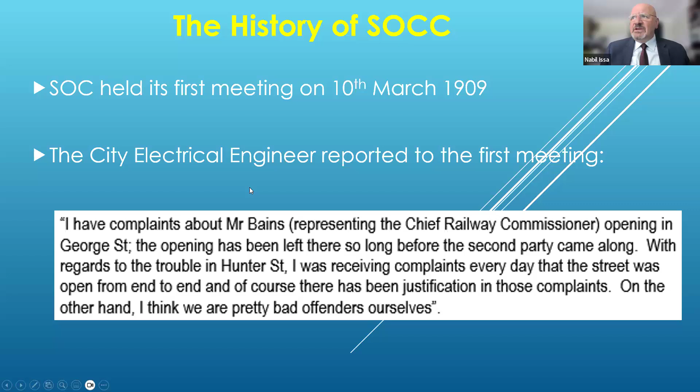In 1995, that organisation was reconstituted to cover the whole of the state. And in 2013, it was incorporated and renamed, rebadged as the Streets Opening Coordination Council.

So some of the outcomes of the work that's happened over 115 years, but in particular in the period after reconstituting the organisation to become a statewide organisation, it's become a peak industry forum for collaboration, sharing of information, and developing standards between road authorities on one hand and utility service providers or utility asset owners on the other hand.

One of the key outcomes was the formation of an organisation called the Sydney One Call Service, which later became Dial Before You Dig New South Wales ACT.

And there's been numerous other documentations and agreements put in place. Some of those were the shared trenching agreement, which involved 2-way or 3-way types of agreements. A 2-way would be between the power utility and the telecommunication carrier. The 3-way would be between those two organisations plus the gas company.

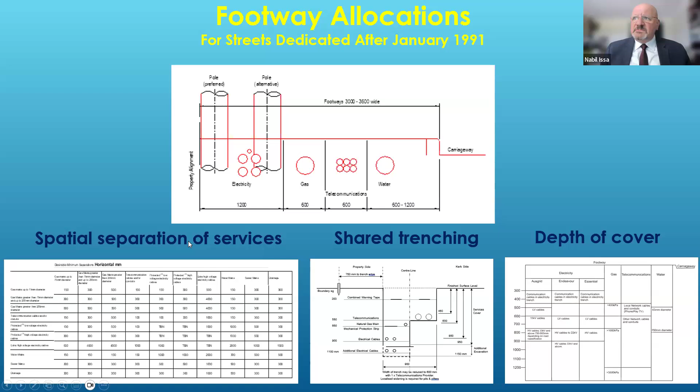So that was a bit about the history of the SOCC. What is the future of SOCC? SOCC has been working on rolling out the work that's been done over 115 years on a national basis. We acknowledge that the issues experienced in New South Wales are not unique to this state. They are common right across the country, hence the initiative to look at rolling the organisation out nationally.

Then there'll be the South Australia, Northern Territory and WA chapter later on. In terms of timing, by December this year there will be a New South Wales ACT chapter in place, and the first of the other chapters will be set up in March 2025. That'll be Queensland and Tasmania initially, and then we'll work on getting those other chapters in place later in 2025.

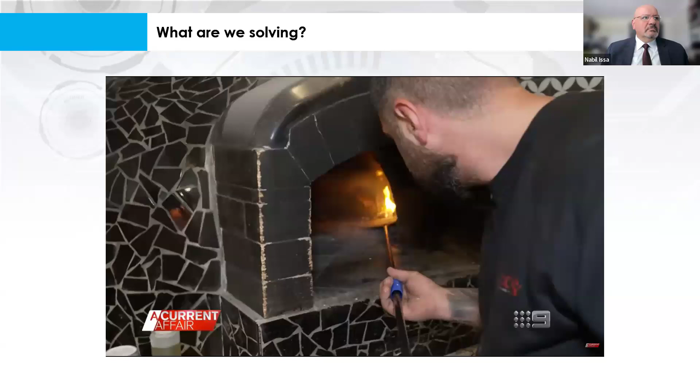Two councils and one road that runs between them, what could possibly go wrong? In this case, plenty. The road needs resurfacing, but the councils didn't work together, leaving the job half done. On one side it's pockmarked with potholes, on the other, beautiful blacktop. Poath Road in Melbourne, cutting through Murrumbeena and Hughesdale, is the borderline between the city of Glen Eira and the city of Monash. Monash went ahead with their resurfacing a few weeks ago, while Glen Eira chose not to crack on at the same time, frustrating locals like George, who runs Chichio's Pizza, and Wayne, a resident, who both say the councils should coordinate. The mismatch runs for more than two kilometres. Experts say working together could split costs and deliver better value for ratepayers than hiring separate contractors. Glen Eira Council says they plan to fix their side eventually, with CEO Rebecca McKenzie saying both councils worked together to ensure Monash's current works complement Glen Eira's future works. Resident Danny suspects it's about the bottom line: Monash had budget to spend, Glen Eira didn't. Chichio's Pizza has even created a new item inspired by the situation: the Poath Road Special, half complete, half incomplete, available only this week.

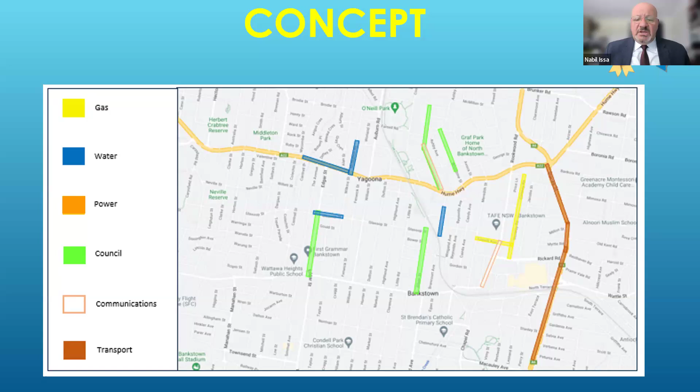That's just the concept, a screenshot of the concept. All the services are color-coded. For example, brown is for transport, green is for councils, power is orange, yellow for gas, and so forth.

They're all color-coded for easy identification and mapped out. This is just a screenshot of the Canterbury Bankstown Council area and the projects uploaded by Canterbury Bankstown. That's the live system, live data taken this morning. It shows how the projects are clustered and how many projects are in each cluster.

When you dig deeper into each of the clusters, it brings up the map, Google Maps, and shows the projects being mapped out, the project ID number. You can drill into each project to find out who the contact is, what the timing and timeline is, whether it's still proposed or confirmed, or whether you're looking at old data.

What I've done here for the purposes of today's presentation is I've got into the live system and created a project. If I go back one slide, you'll find that here - Ivy Street. So I've created a project along Waterloo Road to generate a collaboration opportunity. I created that under my access as a SOC user.

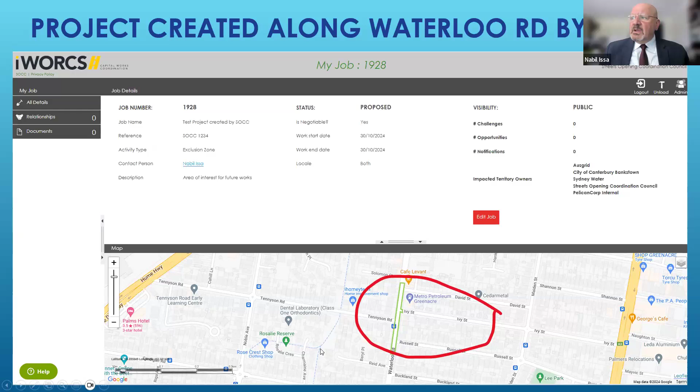And here it is, displaying my own projects as SOC, not showing any other users' projects. Then I logged in as a Sydney Water user and created another project to intersect with Waterloo Road along Tennyson Road, which is circled in red.

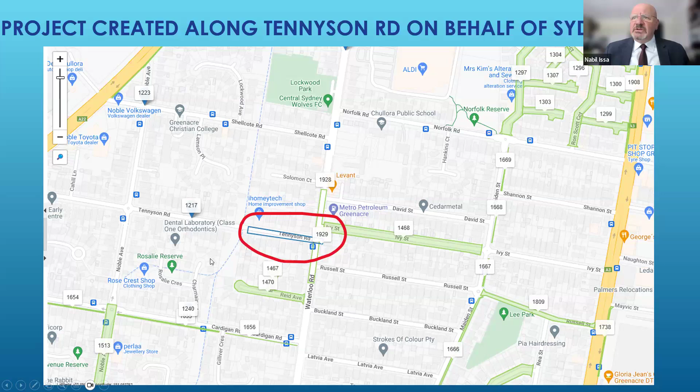Immediately after I created that second project, I received 3 notifications into my email, and I'm sure the other users from Sydney Water and Canterbury Bankstown Council would have received similar emails. The email refers to the project, which I called test project number 2 created by SOC, and says this project has been created in your exclusion zone called test project created by SOC.

It's owned by Sydney Water, so I referred to that second project when I logged in as a Sydney Water user. The project contact person for that was Stuart McDonald. Their contact details - phone, email address - and what you can do to view that job, with links to that job.

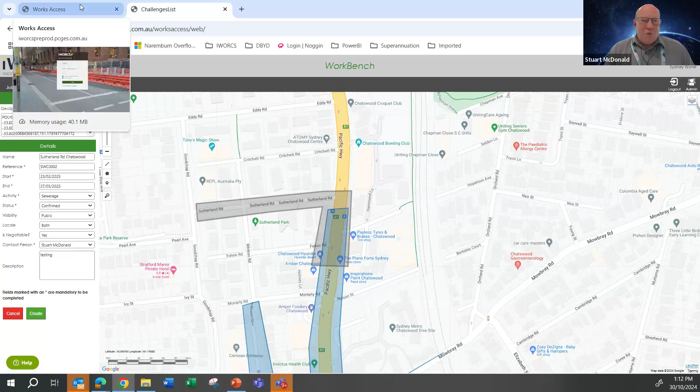And I can create that project. Now that'll take a couple of seconds to create. I'm just checking I've got all my things put in there. Let me just, because I've been sitting on this for a while, sometimes when you sit on the system open for a little while, it can pause. So let me just reopen this. But you can see how simple the process of creating a project is. Now, that is creating it live directly into the system as a one-off job. But as you can appreciate, you can do the bulk upload as well.

So you can see that's going away now and creating that project, and you'll see that the polygon comes up in blue because I'm on the Sydney Water account. It's recognising Sydney Water as having blue assigned to it. So yeah, it's very quick and easy to create that.

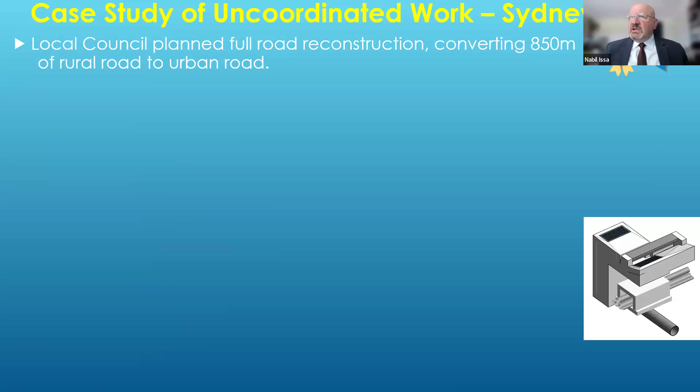And this is a case study where a local council planned to do road reconstruction, affecting about 850 metres of road. Before they were getting ready to start that reconstruction, they found that power cables had been laid in approximately the location that was going to be occupied by the proposed drainage that council was proposing to install. So basically, the power company beat the council to the site, installed their 33 kV sub-transmission cables. The council was quoted over $400,000 to relocate the power cables.

Eventually, the council decided that they would redesign special pits for this particular project. The design work came in at a cost of $5,000, and then the redesign of the project cost them some 6 months in project delivery delays. The power cables had to be encased at each of the pit locations. The special pits cost $17,000 each to build versus $2,500 for those using the standard design.

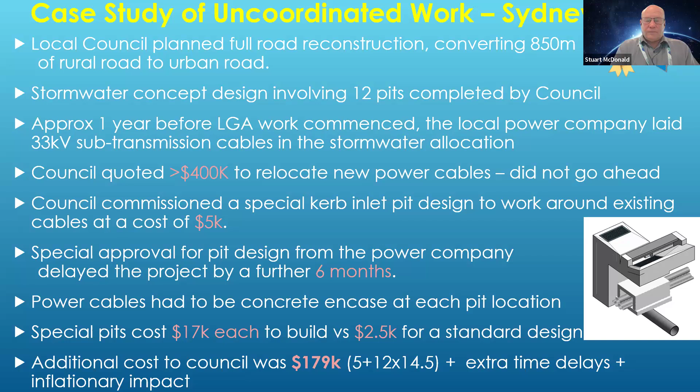So the additional cost to the council in dollar terms, not including the time delays and other things, was nearly $180,000. If this particular council and the power utilities had shared their forward plans somehow, particularly on a system like iWorks, this wouldn't have happened.

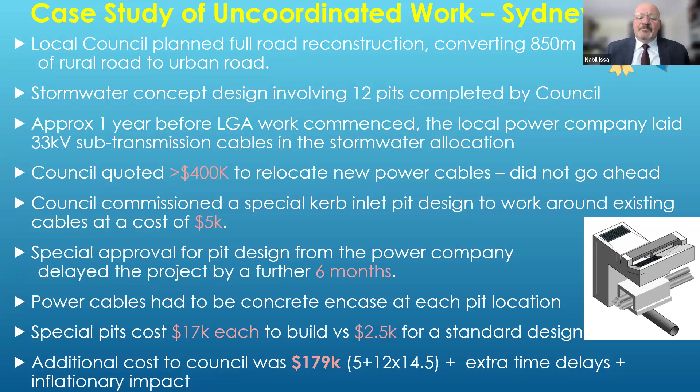Here's another case study, which, Stuart, do you want to talk to this?

I can do. This was down in Warrawong. Our project manager at the time saw how much work the Wollongong Council was doing and thought to ask our operational teams as to what the performance of the water main looked like. Through a bit of investigation, we saw that the water main was coming to end of life. So we fast-tracked the replacement of this water main so that we could align our work as closely as possible with council, and council were able to delay the road work so that we could install the water main, and the road was resheeted in one collaborative approach.

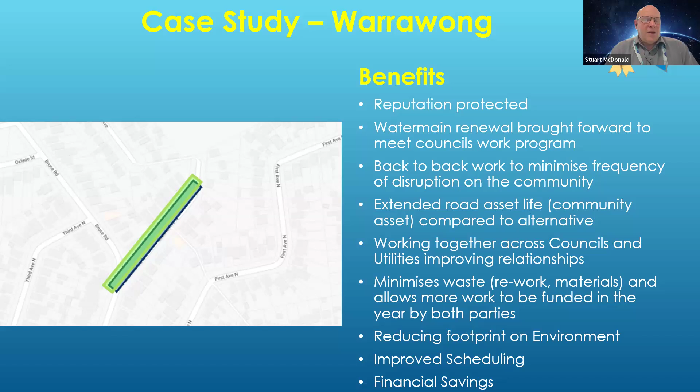So there's certainly opportunities for utilities to review the performance of their assets when they're coming up in their end of life, and consider the opportunity, not just whether it's a financial return today, but what's the actual non-tangible value add that can be used to help justify bringing forward a water main renewal or some other asset renewal as well. That's another typical situation where collaboration was able to be achieved.

Again, Stuart, just briefly on that. Yeah, this is in Greenacre with Canterbury Bankstown Council, and because we're both signed up to iWorks, we could see each other's works. On this site, on the right-hand side of the project, there's a public school. Left-hand side, the big building there is both a Catholic school as well as a church, and the bottom right, you've got playing fields as well.

With that higher level of intensity, it's important that we get these things right, and being able to communicate and coordinate these works meant that the water main was performed first, and then the council came along and resheeted the work as well. So whenever there's work that occurs in the common space, the costs associated with that work should always be shared.

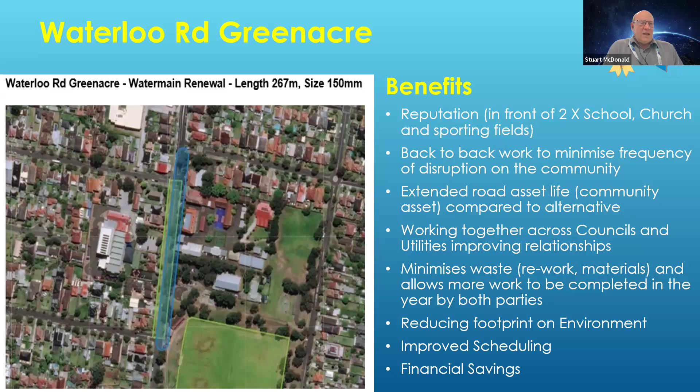And that's the approach that the SOCC has. It's not about one organisation winning, it's about everyone winning together. So I like to use the term win-win-win outcome. The council wins, the utility wins, but most of all, the community wins.

So we're all in agreement when we come to what the roadway looks like in terms of the allocation of assets, what makes good sense as to who should be where, and what the asset separations are, vertical, horizontal, and so on. That's the same concept that we like to bring to iWorks and the collaboration.

I know Phil has got a comment there, and it's a very valid comment. Phil, if you don't mind, I'm just writing a comment, but certainly appreciate if we could have a longer conversation afterwards about that, and what the hesitation is from councils, and not just councils but utilities as well, in terms of why some organisations might be a little bit slower to be innovative in this space.